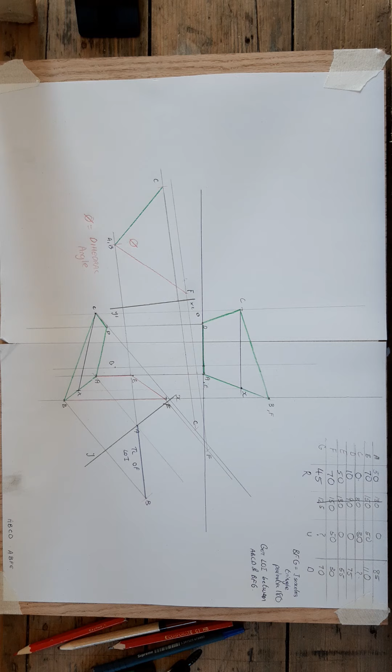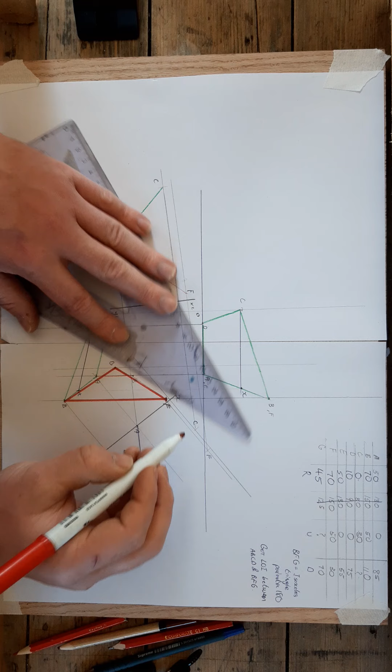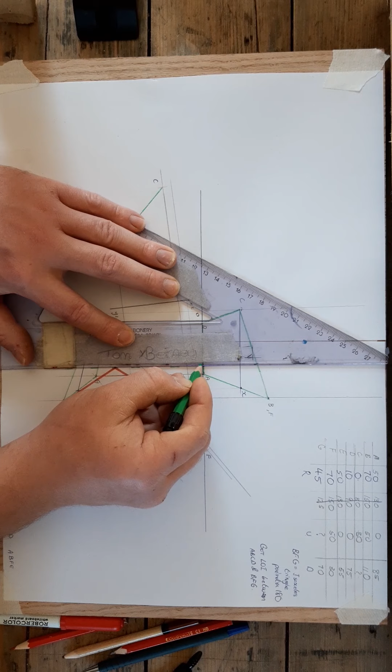So we have BFG got. What I need to do now is try and find G up here. But the problem is that I only know G is somewhere on this line here that's heading up. So I have G in plan, we got that from the coordinates, but it's somewhere on this line that's heading up is where G is in front elevation. Now BFG looks like a triangle down in plan, which I've just drawn in red marker, but it's going to look like a line up here.

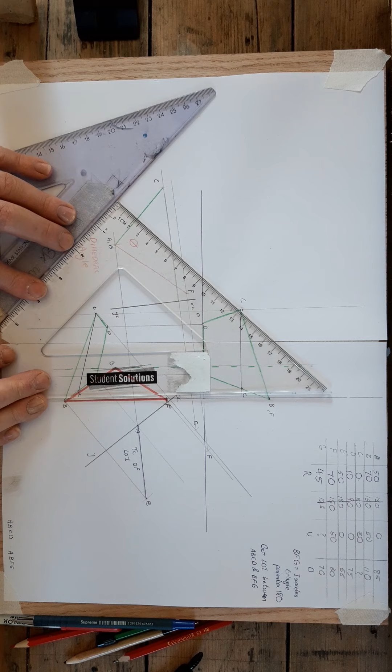So what's really important is finding this line here, which is 90 degrees to the line BF. So I'll do that properly, going 90 degrees to the line BF. This line right here - that line is what we're going to see up here, because this triangle will turn into an edge view. But the problem is that we don't know how long that line is.

We're just being told that it is an isosceles triangle with a perimeter of 180. So I'm going to draw that isosceles triangle. No matter how stuck you get, anyone can draw an isosceles triangle, and usually the solution, if you're trying to find the problem, is within that.

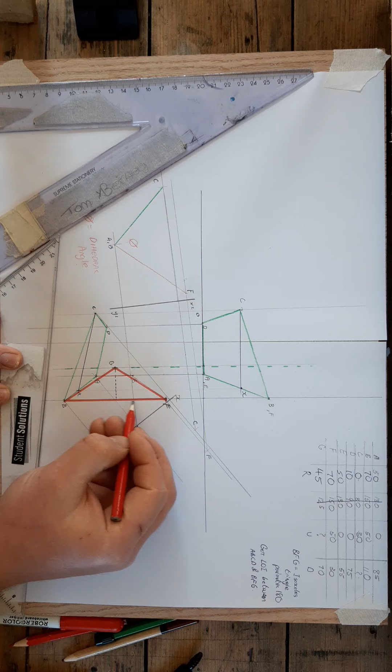So I know that BF is the base of the isosceles triangle. I'm going to go over here and draw a flat line anywhere I like, anywhere there's a bit of blank space. And because we're looking down, BF is a dot here, and we're looking down on it, it must be parallel to the horizontal plane - so that means that must be a true length.

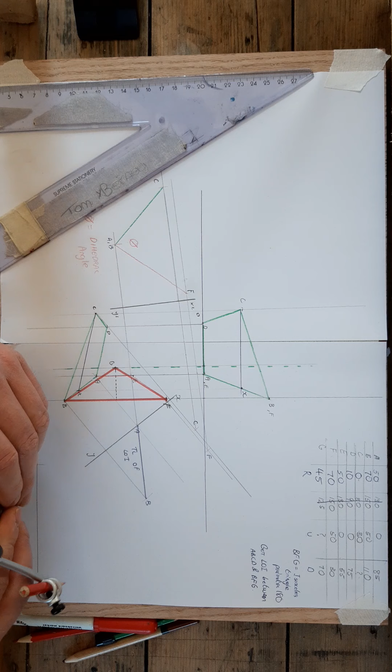So I can take the length of BF and put it onto that line. Remember, that line is totally random - I'm just drawing an isosceles triangle. So that is BF got.

Now I need to subtract that away from 180 millimeters. You can measure it with your ruler and find out whatever length it is - in this case it's 80, and you're left with 100.

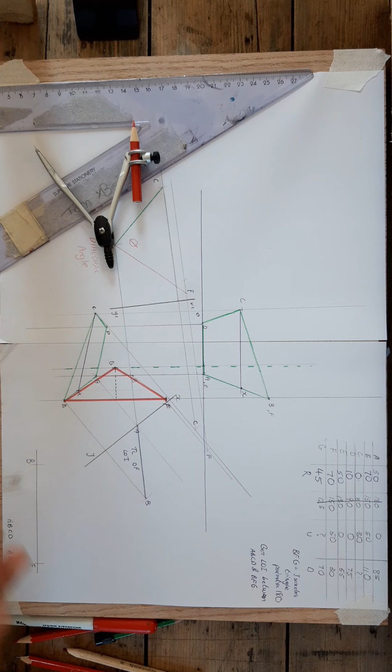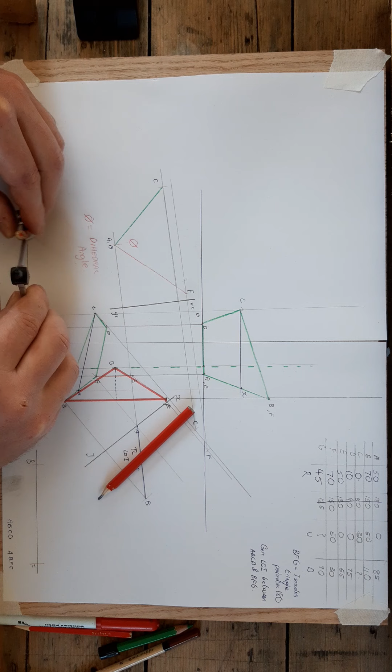If you want to be more accurate, I would again draw any line anywhere I like. Onto that line I would put 180 millimeters - that's 180. I would take that length of BF and subtract it away from that. So I have literally removed the length of BF, and I'm now left with this.

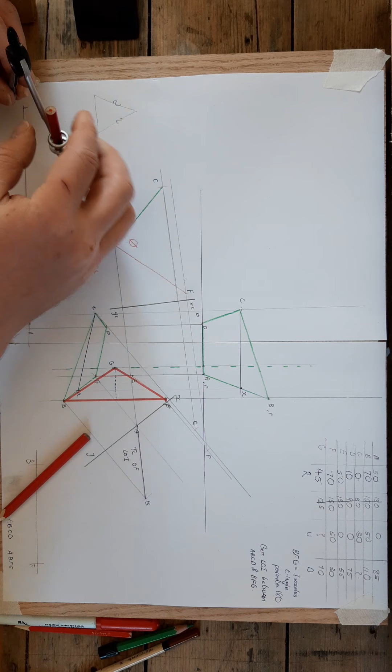Now because it's an isosceles triangle, that means this side and this side have to be the same length. So if I take what's left and bisect it with my compass, that gives me the other two sides of the triangle.

Now again, you could just measure it - it should be 50 mil. And when I check it here with the ruler, it's exactly 50. I don't mind which way you go about it.

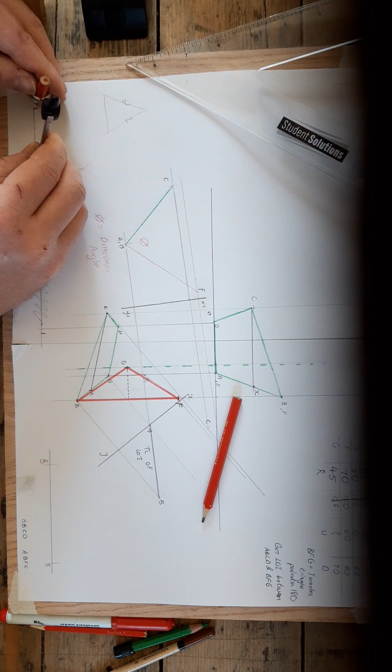Now what I'm going to do is take that 50 mil on my compass, and from F I'm going to swing it, and from B I'm going to swing it. And that creates this isosceles triangle that they were talking about in the question.

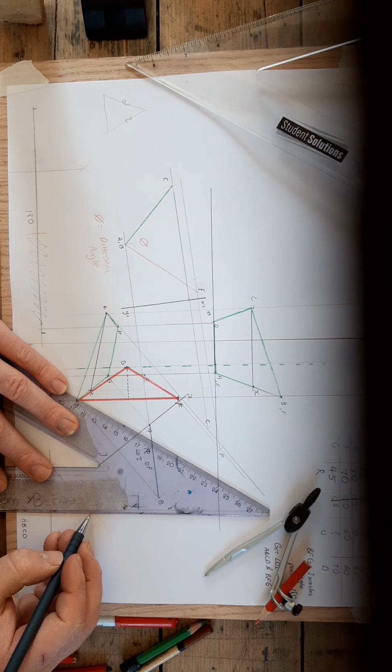There's a lot of drawing involved in that, so I wouldn't be wasting your time even if you only got this far. Anybody can draw an isosceles triangle.

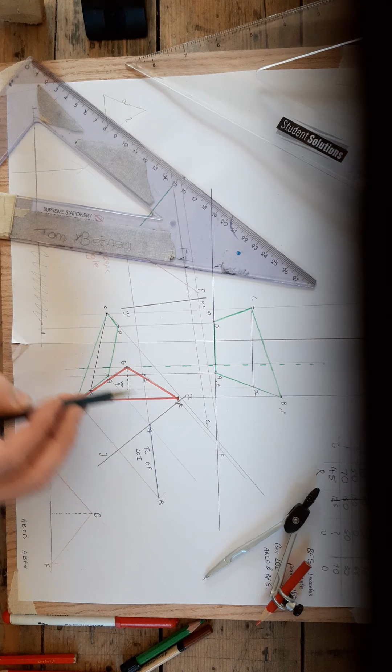Now, that's the true shape of the triangle BFG, so that has to be G up here - that's its height. Now when I'm sitting here looking perpendicular to this line, 90 degrees to that line, I'm going to see a true height up here. I have a true height got.

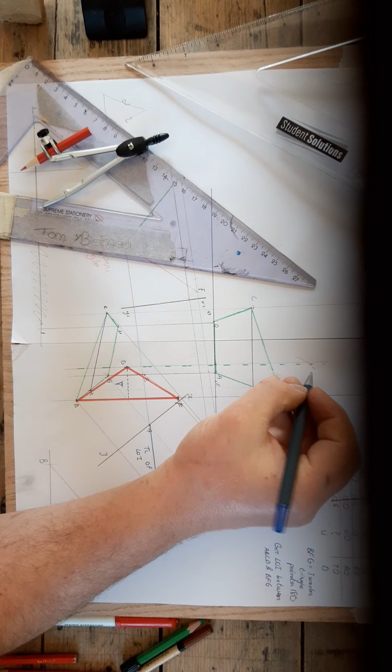So if I get the height of that isosceles triangle on my compass, and swing that from BF up here, where that crosses over the line from the very start - this line coming up from G - that has to be the location of G. And more importantly, that defines the triangle in front elevation, which because we're looking at the side of it, will appear just as a line.

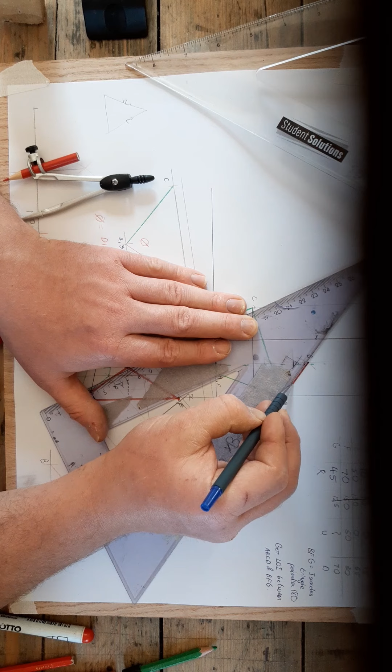So that red line I've drawn is the red line of the triangle, and inside that red line will be the blue dotted line I'm drawing now, which is that blue line there in the middle. And that's how you set it up.

Okay, so the last part is part D. We have to get the line of intersection between ABCD and BFG. We're going to talk about that now in a second.